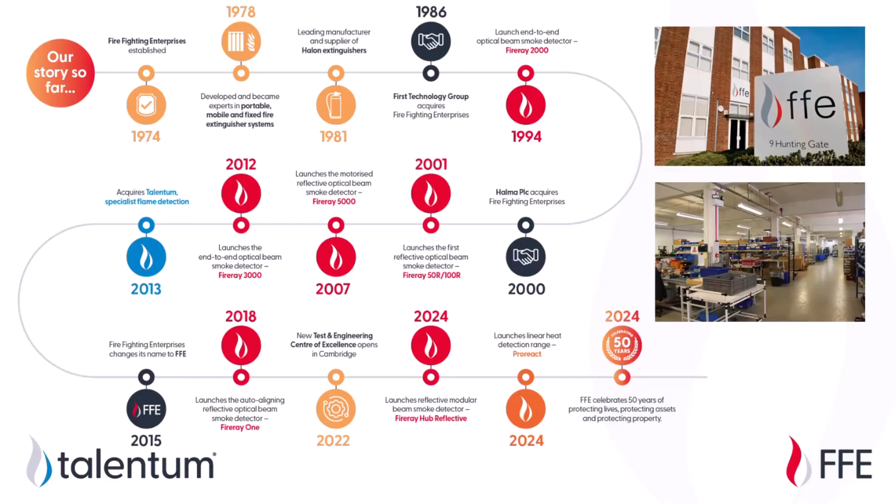And we have worldwide approvals and certifications. Each of our products is also 100% inspected and tested before it goes out the doors. And as somebody who handles the tech support aspects, that's something that I appreciate, and it is exceedingly rare to find a defective product from the manufacturer out there.

So optical flame detection, and we'll talk terminology on that, how you might see it in the codes and standards and things like that. These are devices that do detection of fire, unwanted fire. And so the agenda is we'll go through the what, where, why, and how, as well as some of the who.

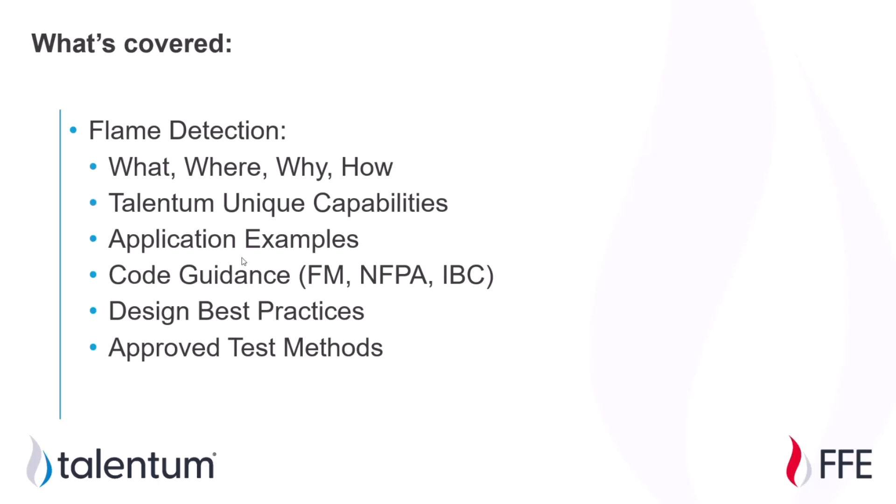There's some unique capabilities with the Talentum product line that you won't find anywhere else as far as flame detectors are concerned. Various application examples are sprinkled throughout, along with code guidance or standards, including FM data sheets. There's something new that's very relevant for flame detection in International Building and Fire Code 2024 edition. We'll talk about that. When designing with flame detectors, we'll talk about some best practices, what those codes and standards say, as well as how to do your testing, what kind of options you have there.

So a flame detector in the fire and life safety industry is something that is sensing or detecting unwanted fires. This is sometimes confused with flame monitors, also sometimes called flame detectors, and that's more in the industrial realm when a flame monitor is checking for wanted flames. So think of like a pilot light or something like that, where you have a flame or a fire in an application, and it's making sure it is there when it's wanted. These are detecting unwanted fires, flames.

So the NFPA 72 definition of a flame detector is a radiant energy sensing fire detector, and you will see it worded that way in many of the NFPA standards as well as FM data sheets. So keep a lookout for that. It might just say radiant energy sensing fire detector and not flame detector.

So a flame detector, how is it different than other detection devices? Well, it's detecting the light that's emitted by the fire itself. A lot of that energy or those photons emitted from a flame are in the visible spectrum, so we can see them with our eyes. But a lot of that energy is emitted in wavelengths that we cannot see with the naked eye, so that includes infrared, that includes ultraviolet.

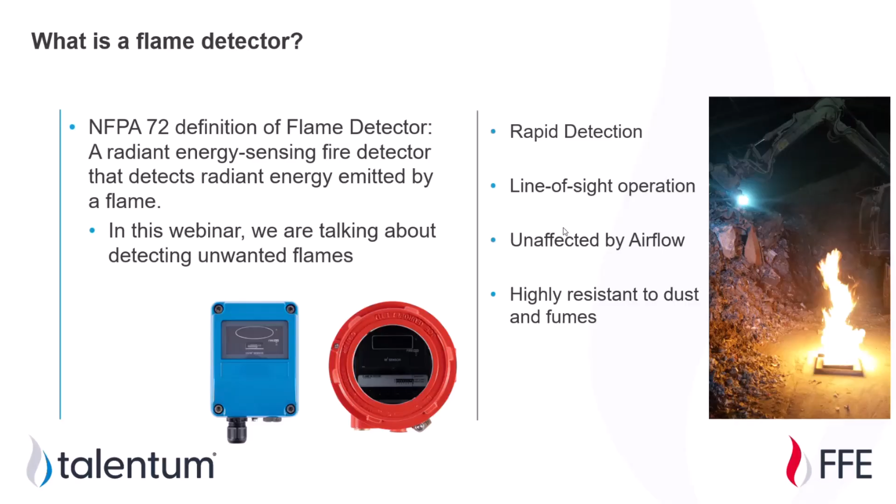The main applications for optical flame detectors - we know oil and gas is a very big industry, one of the biggest in the world. So lots of flame detectors are used all the way along that supply chain or production process, from crude, offshore rigs, refineries, midstream, as well as all the way to the dispensers for consumers.

You have different industrial applications. Paper and textile - actually the Talentum company was founded by the owners of a textile mill for their use in that application. We'll talk more about paper and textile later, and some of the standards involved. You have aircraft hangars - optical flame detectors have been a very integral part of designs for aircraft hangars for many decades. We'll talk about some of the latest developments with that, as well as what people are currently using for aircraft hangars.

General industrial can cover lots of different things - hydraulics, conveying, various hazards. A lot of it is insurance driven, but not always. Sometimes these are used as life safety devices. FM really does carry a lot of weight when it comes to optical flame detectors. UL really doesn't get involved with optical flame detectors, although it can be used as a life safety device. Then you have battery areas - some of the newer editions of the International Building Code and International Fire Code have new language regarding battery areas that includes flame detectors.

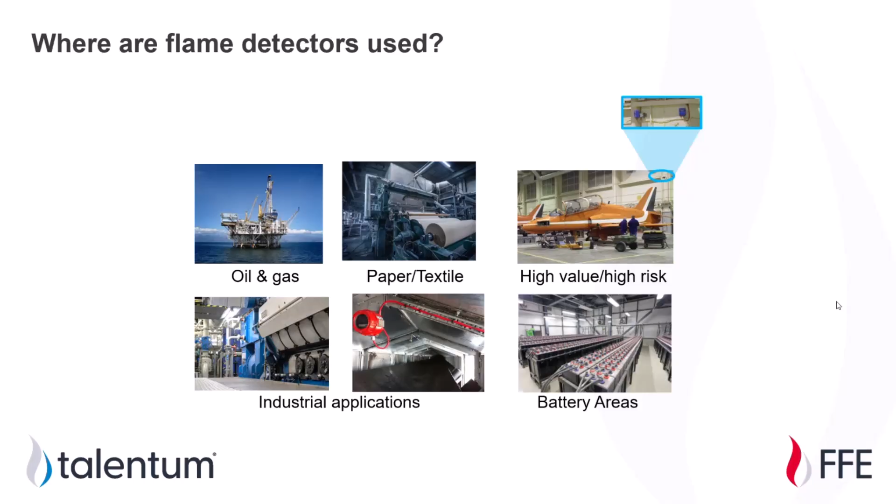So why would you use a flame detector? The obvious reason is a code or standard requires it - this could be various NFPA standards, building codes, fire codes, and things like that. It could also come from an insurance requirement. We know FM has lots of data sheets which standardize a lot of the fire protection and prevention aspects in factories especially.

With optical flame detectors, when it comes to hazard types and response times, these are typically heavily engineered designs that the devices are being incorporated into. It could also be a standard or preference by a corporation or tenant for their buildings, based on what hazards and risks they have going on. But the common thread is typically that you need fast response time, and what happens after detection can vary - shutting things off, having suppression, or simply alarms. Fast response time is the name of the game, as well as prevention of nuisance alarms. So two very important factors.

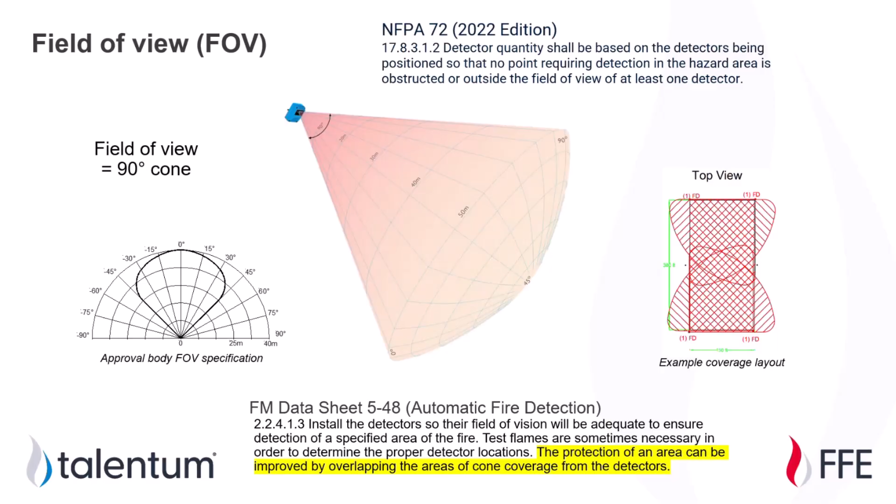Also, the FM data sheet recommends overlapping of coverage. So you're typically going to see every spot in a hazard area covered by at least one, if not at least two, separate detectors, just because of the nature of temporary obstructions and the unknowns involved with that.

NFPA 72, right off the bat, says there should be an analysis done, or an engineering evaluation as well. Important factors that get their own sections include matching the spectral response to the spectral emissions of a specific hazard or fuel for the fire. So if you have a solvent room, whatever the spectral emissions of that solvent is, you're going to want a device capable of detecting that and matching those emissions with the responses.

And also with optical flame detectors, they're having to make decisions very quickly. For human terms, I guess it's very quick, but for a machine, maybe not so quick. But you always want to be conscious of the potential for nuisance alarms. You have infrared and ultraviolet and visible light sources everywhere in lots of different places. Being conscious of those and doing an assessment is something NFPA 72 recommends.

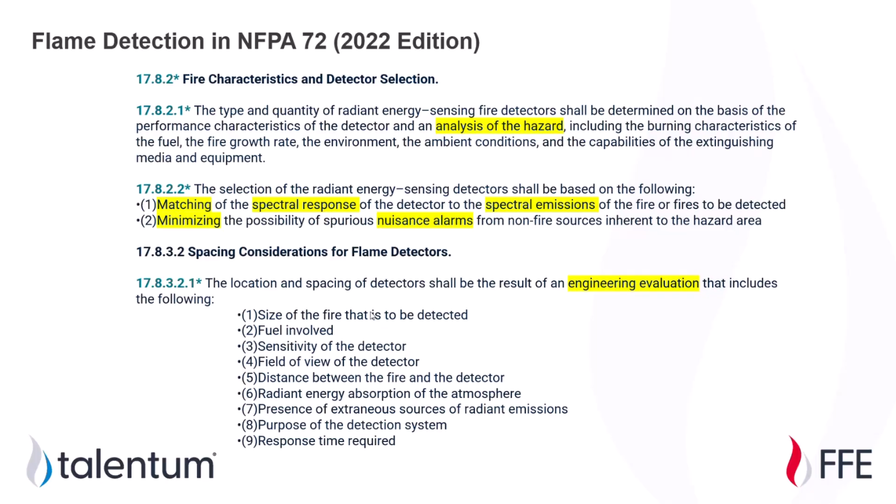And they give you 9 different factors that should go into your engineering evaluation. The FM data sheet goes into a lot of the same stuff, with FM doing the actual testing of devices, which includes testing with nuisance alarm sources. So a lot of that is listed out in the FM data sheet.

So X-ray machines, arc welding, different germicidal lamps that maybe use UVC, considering the fuel, as well as matching the spectral response to the spectral emissions.

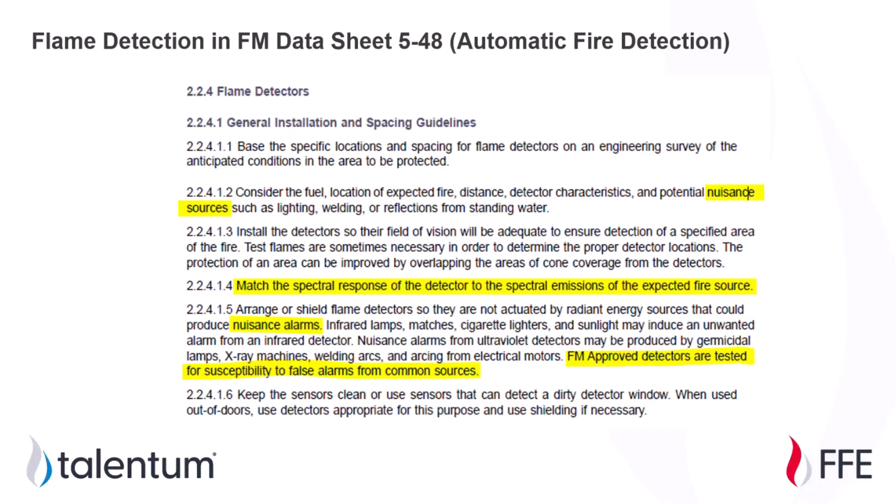So we'll talk about the different categories of fuels. There's 3 or 4 main categories that you can have a fire from, different fuels as it relates to flame detectors. Essentially solvents, hydrocarbons, and then some gases like hydrogen, that are all going to have different spectral emissions.

So some of those fuels here, hydrogen is a unique one. It burns almost invisible to the naked eye. If it is a sunny day and you have a hydrogen fire, you may not be able to even see it with the naked eye. Hydrogen is being used in fuel cell technology. I know a lot of warehouses have started using hydrogen-powered fork trucks, so there's less downtime than regular batteries.

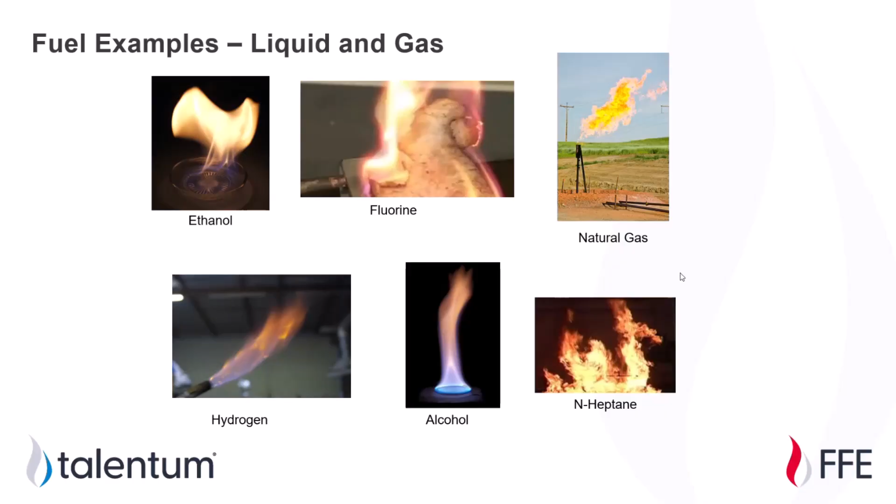Flame detectors come into play with that, as well as your other gases. And your solid fuel examples, of course, we know things that have higher susceptibility to fire and flaming type fires: paper, plastic, textiles, electronics, including batteries, which are becoming more and more prevalent.

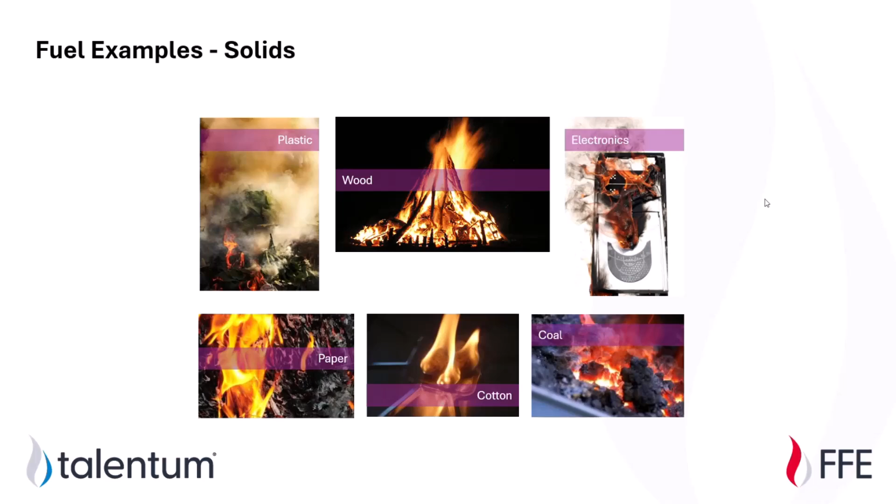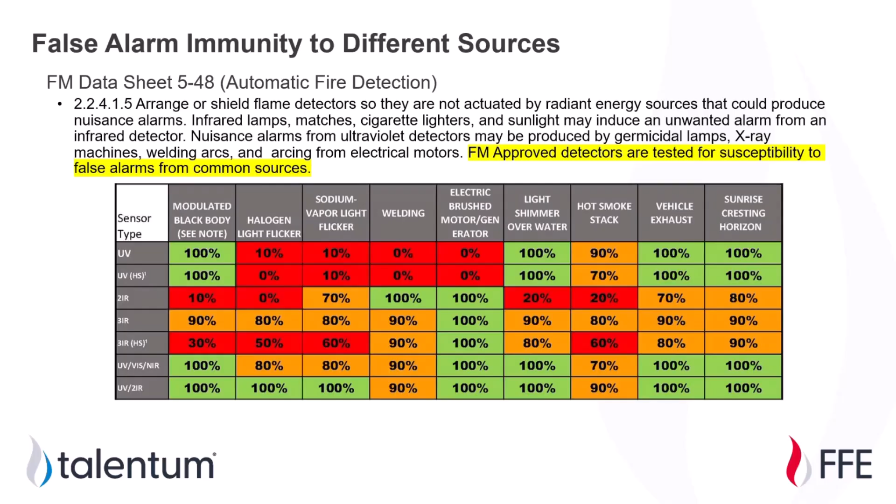And typically, you can see the more sensors that you have, the better false alarm rejection you'll have. And that's not always the case. It's going to depend on the environment, on the false alarm sources.

Hydrogen is one of the unique ones, does not have that spike. So if you're using any old flame detector that is geared to 4.3 microns, like most flame detectors are, you run a very high risk of not detecting it.

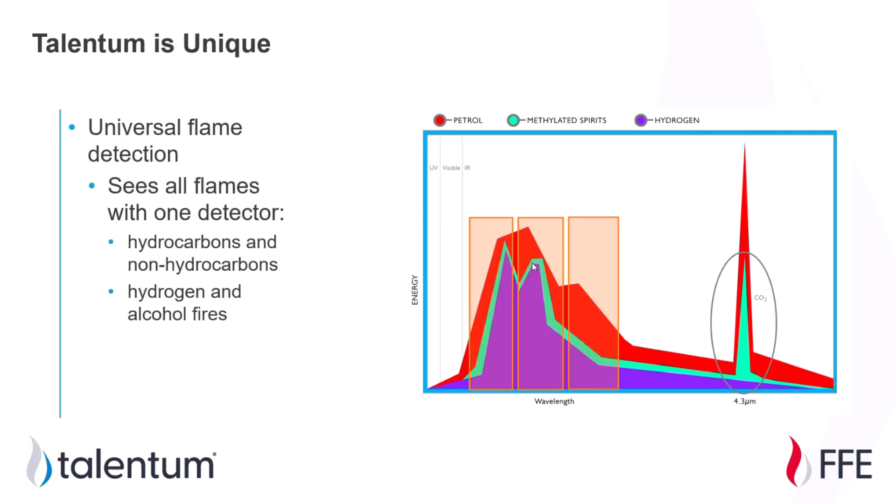So with Talentum, it is sensing more in this region of the infrared spectrum, so near IR covers your hydrogens, hydrocarbons, and solvents.

So with Talentum as well, if you have, say, 3 IR, which is one of our common flame detectors that we offer, meaning there's 3 IR sensors, each of those 3 infrared sensors need to sense or detect the flame, or the light, the photons given off by the flame. Not only do all 3 need to detect them, but they also need to be in the right proportions. So for certain sensors, you could need to see 3 times higher energy amounts than another wavelength. It's comparing the level of signal that it's getting to one another, and that is one of the verification methods that helps prevent false alarms.

Also, it makes sure that the signal that it is getting is a random flickering, because natural flames are going to have a random flicker frequency. If you think of a strobe light, that's going to have a constant frequency, and it will reject anything with a constant frequency. If you think of sunset, if you put a shop fan in front of that sunset, it will create that strobe effect, but at a constant frequency. That is something that is rejected.

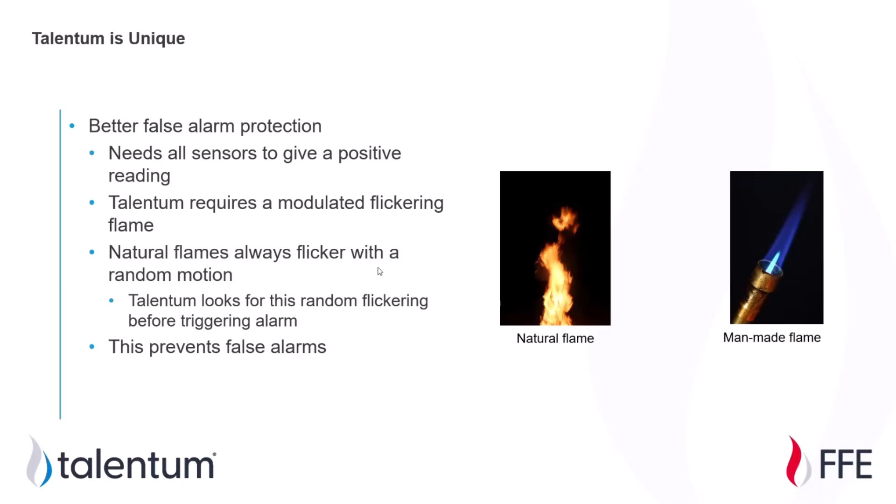So just some of the methods in the firmware of the devices where it's verifying and helping to prevent false alarms or nuisance troubles, nuisance alarms.

So another unique aspect with Talentum, ignoring the 4.3 micron CO2 spike that most other flame detectors focus on, is that in that wavelength, or near that wavelength, you have glass absorbing or completely rejecting any light trying to pass through. So we can see through a plate of glass no problem in the visible spectrum, but in other wavelengths that we can't see, it might be as opaque as anything. That is the case with the 4.3 micron spike, it is almost completely blocked by plate glass.

So a lot of these devices that focus on that wavelength, they'll use other types of materials for their lenses, like sapphire and quartz and things like that. So with Talentum, it has been proven through third-party testing that it can detect fire through plate glass as well as clear polycarbonate. And we're going to go into more detail on that testing.

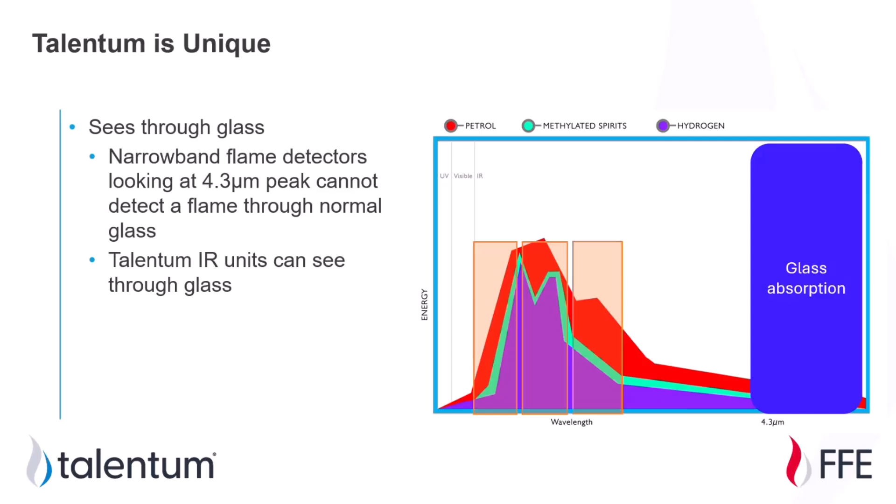And it's by no means approved or certified at long distances, but as a proof of concept, it does have the ability to, at a very good performance, detect through glass and clear substrates like polycarb.

So here was the test. You have University of South Carolina, Aiken, testing in conjunction with a nuclear facility. And the interest in the testing was they have these glove boxes.

If you think of Homer Simpson with the glowing yellow uranium on mounting devices inside glove boxes, or environmental chambers with glass, being able to mount detection outside of these is desired. The test was set up at about a 6-foot distance with either a plate of glass or polycarbonate right in front of the Talentum IR3 model alongside a video flame detector, another device available on the market. It was thought that since the video flame detector can see through glass in the visible spectrum, it would do well in this test too, but it turned out the Talentum IR3 outperformed the video flame detector.

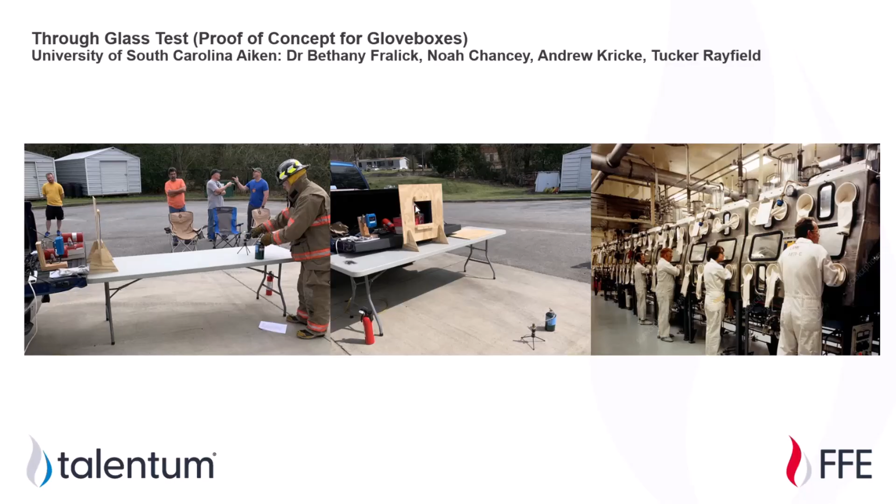So the triple IR, or IR3, is the configuration of 3 separate infrared sensors. You'll see 2 different photos of these devices throughout this presentation. This rectangular blue one is a non-explosion proof housing. It's still cast metal and has a good ingress protection rating and things like that.

But we found that in many applications, even in a hazardous location or not, explosion-proof devices are not always needed. We've compiled over 10 or 12 projects where the assumption was that explosion-proof devices were needed, rated to certain hazardous classifications, when in reality, based on the actual project specs or the location of the devices in relation to the actual hazardous area zone, that was not needed. So you can save a lot of money by going with a non-explosion proof housing, still cast metal. Those are available, and we pass that cost savings on to you if you're dealing with those kinds of projects. Those projects run the gamut from laboratory, oil and gas, heavy industrial, to light industrial - a wide range. If you're interested, we can provide more info.

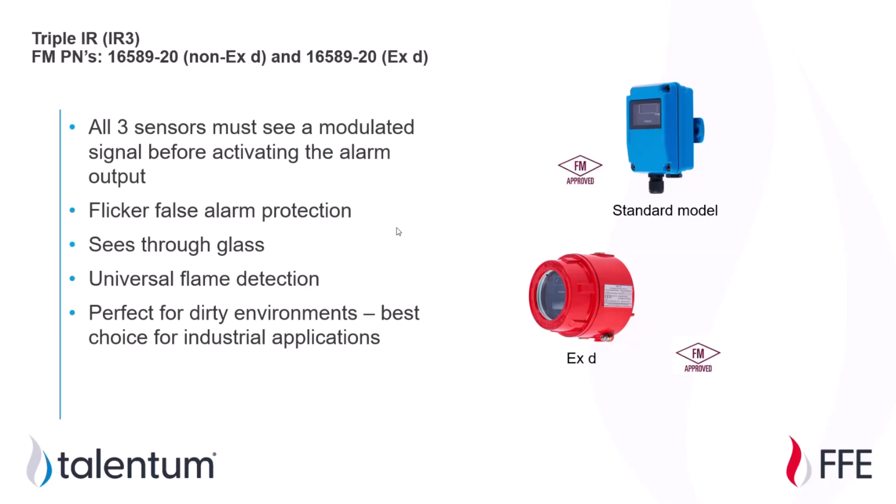So the IR3 model is available in non-explosion proof as well as explosion proof. The other sensor configuration we offer with Talentum is 1 UV sensor and 2 IRs. So instead of 3 IRs, you're swapping one of those IRs out for an ultraviolet sensor. You may see better false alarm resistance when doing this in full sunlight, fully outdoor environments. One potential drawback of going with UV instead of all infrared is that you won't have as good penetration through dust, smoke, and other airborne contaminants.

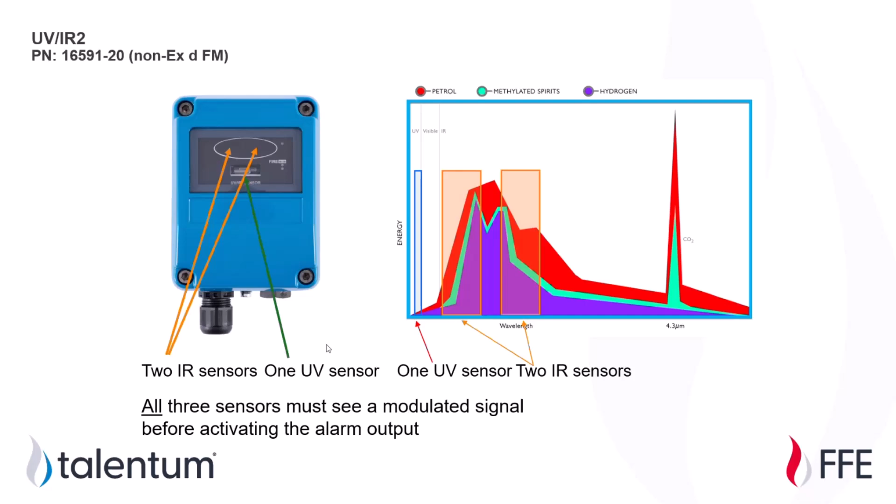FM approval is a given. Pretty much all of the US flame detectors used in the market are going to be FM approved. That's kind of the standard or benchmark for flame detectors.

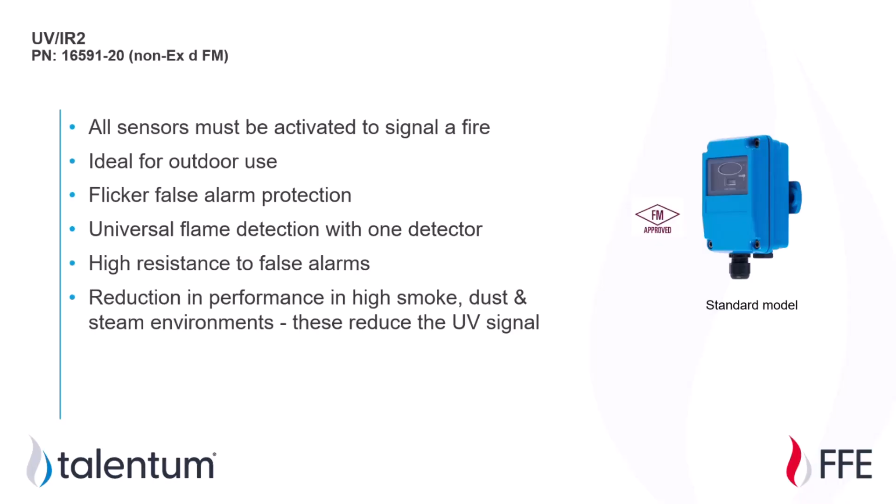And the UV IR2, same concept as the IR3, could do a little bit better for you in those high sunlight areas, fully outdoors. We have people that use the triple IR, the IR3, fully outdoors, even facing towards a sunset over shimmering water, and they've never had any issues with false alarms. So it might give you a little bit better resistance there.

Accessories you might look at when doing a design with flame detectors: usually mounting brackets, but you're going to get those with pretty much every project, especially given the nature of flame detectors and their field of view needing to get dialed in towards a specific place within a hazard zone. Weather shields are very common for outdoor applications, bale yards, and places like that. Sometimes the weather shields might be used as field of view restrictors, like a horse with blinders on - if you have a welding area off to the side doing arc welding, you want to prevent any energy from that arc welder getting into the detector causing a false alarm. You can use these to square off that field of view.

Test simulator - this is a handheld device with an LCD screen. You select what kind of detector you have, hold it about 10 feet away, and it's able to simulate the UV and IR energy from a fire to put it into a false alarm. Always make sure to isolate the devices before doing so. Air purge adapters are a little less common. They are available if you have a high dust area or something like that.

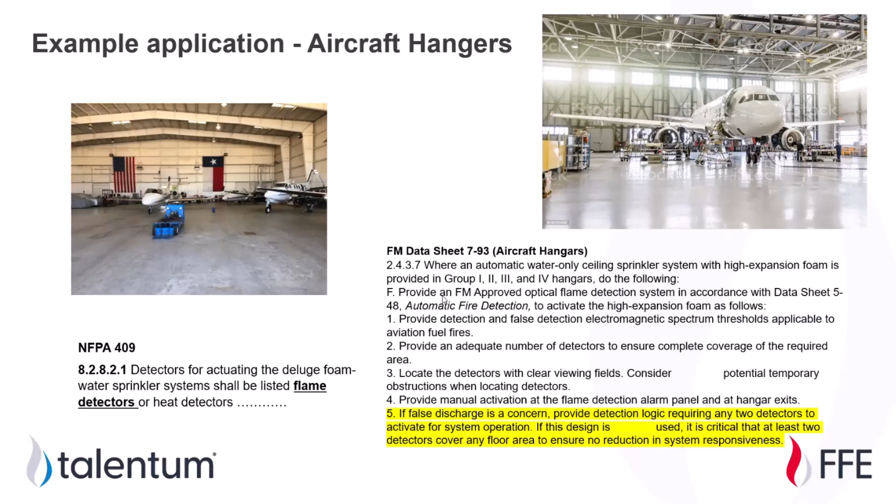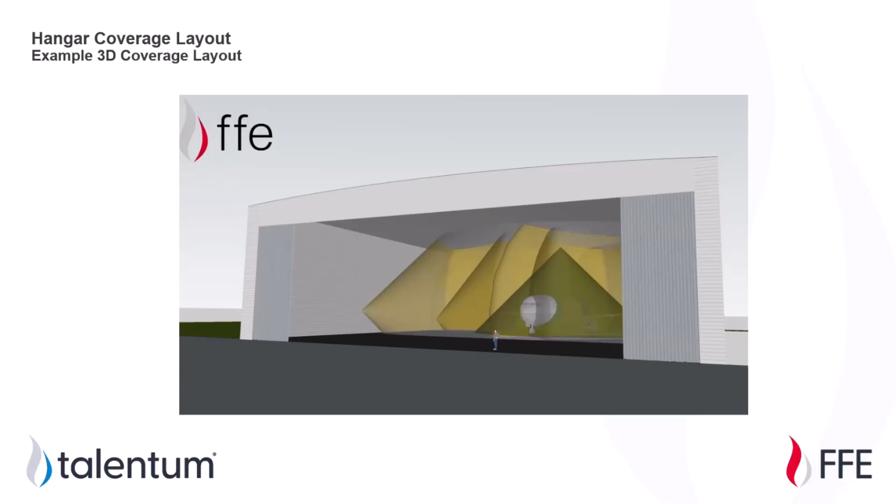Some hangars and for some aircraft, they may want under wing protection and over wing protection, or detection, I should say. So the mounting locations of your devices will depend on what the needs are. There's also a difference if there's maintenance activities happening in a specific hangar. May need additional detection.

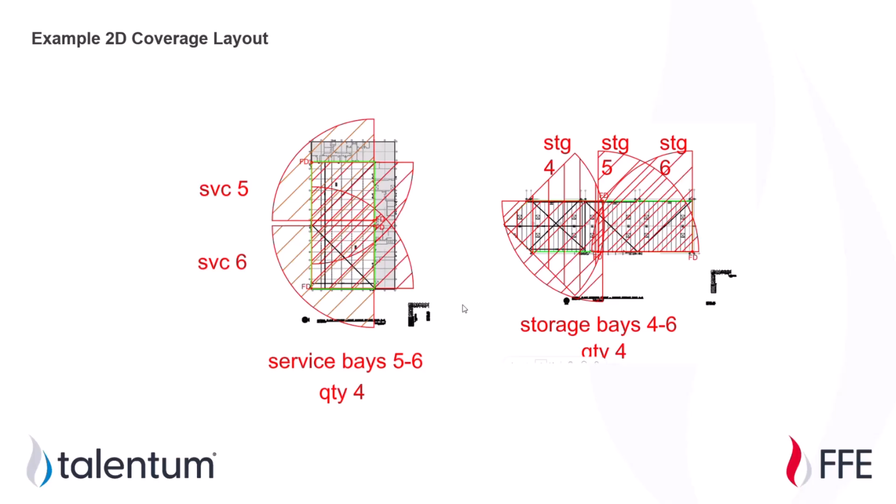So moving on here to batteries. And this is not just battery energy storage systems, or sometimes called BESS, where you have these big batteries that are storing and generating power, transporting power. We do see those in a lot of odd spots now, not just in remote locations, but they can be in parking garages sometimes. If a high rise doesn't have the real estate, we see them as backups in data centers a lot of times.

So there are the battery energy storage systems, which has been a hot topic in the fire protection engineering industry. Recently, the best and brightest minds are working on that. But also just lithium metal batteries that are passive, that aren't connected to anything. Maybe it's even in a box being stored in a storage warehouse somewhere. The new IBC and IFC 2024 edition, they don't make that distinction. They're leaving the door open for each jurisdiction to figure out what they want to enforce. So I don't think that if you have a handheld drill, that they're going to have detection requirements for that.

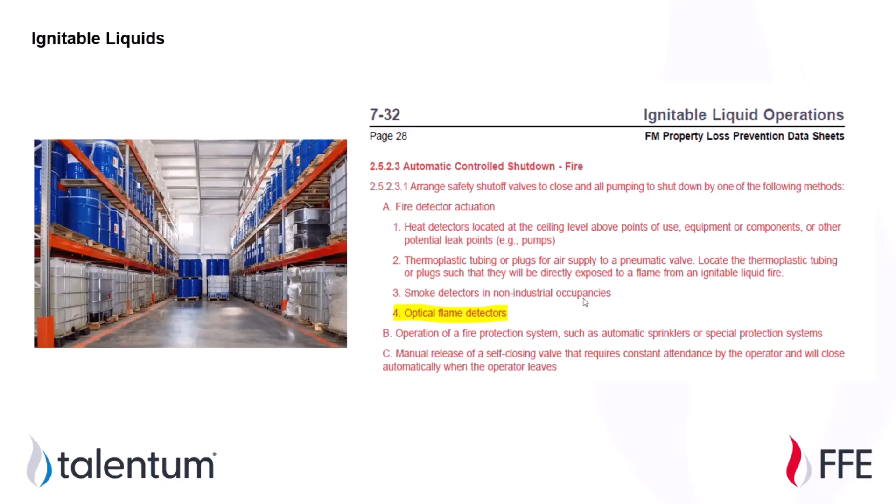Emergency power, running diesel generators or anything like that. You do want to assess how the shrouds might affect detecting a flame itself. If a flame is going to occur inside of a shroud, that might not be the best type of detection until the flame got big enough to spill out outside of any engine shrouds.

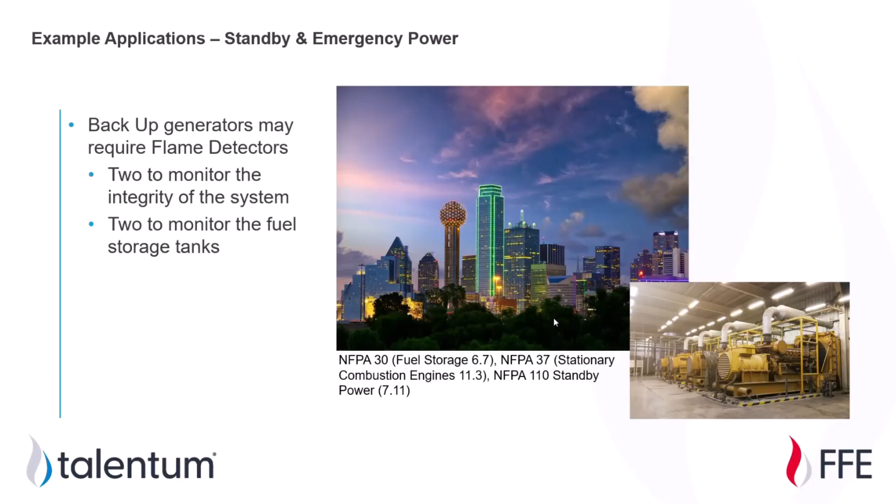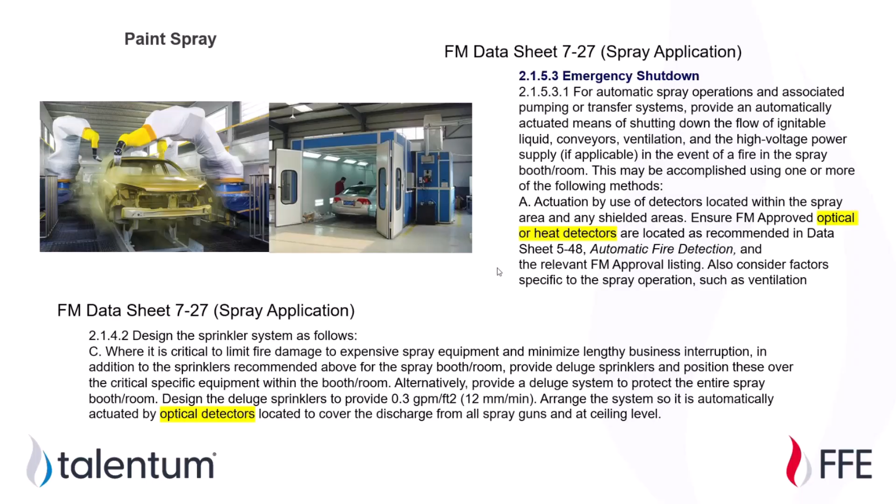So with electric vehicles becoming more and more common, you have the fire protection and detection challenges that go along with that. This includes parking garages, where you have a mix of electric vehicles, internal combustion engine vehicles, and chargers as well. So these electric vehicle charging stations, and then in this same parking garage, you may also have a battery energy storage system.

A lot of these standards are still being developed based on real world fire scenarios that have happened, a lot of it based on jurisdiction, not really to the point of having standards for this yet. But optical flame detectors are definitely in the conversation, as well as linear heat detection, especially with sprinklers and pre-action sprinklers becoming more common, especially in areas that can get below freezing.

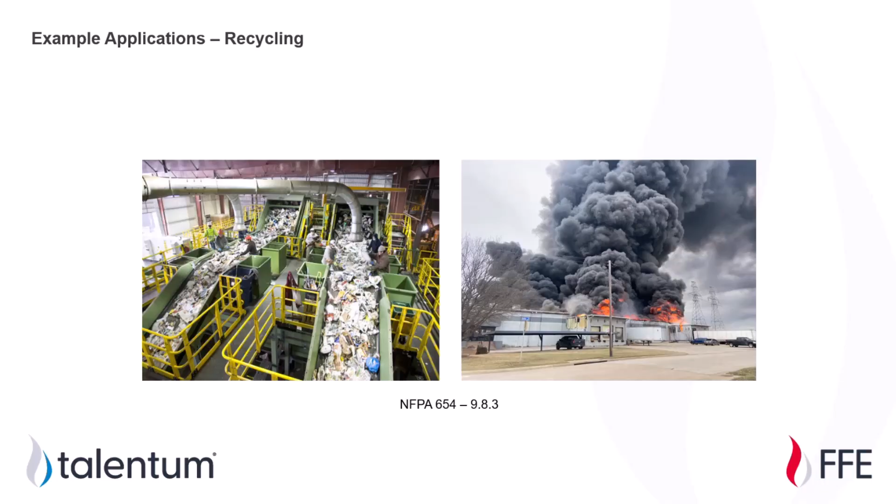Recycling centers, they're going to be dealing with a whole host of hazards, hazard types. So that includes your batteries, your papers, textiles. Those textiles might have been soaked in ignitable fluids. So a lot of those types of things are coming in those doors. And optical flame detectors are a good, fast response way to detect those flaming fires, especially with everything being out in the open.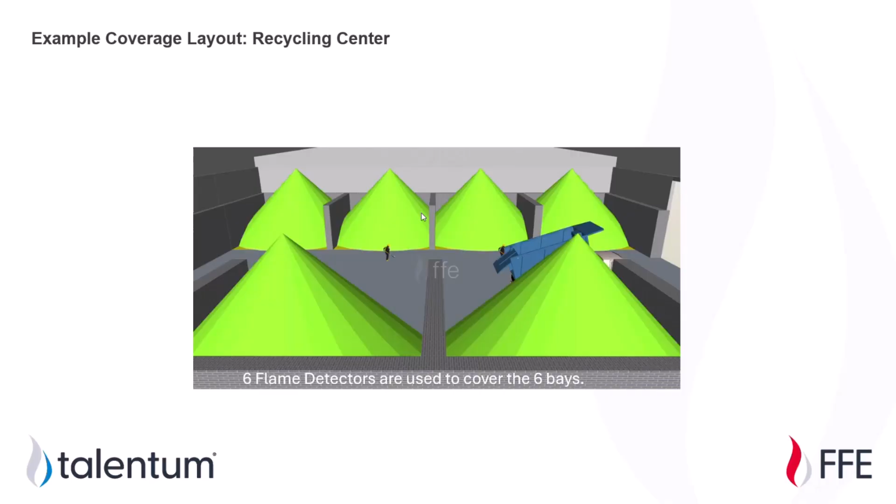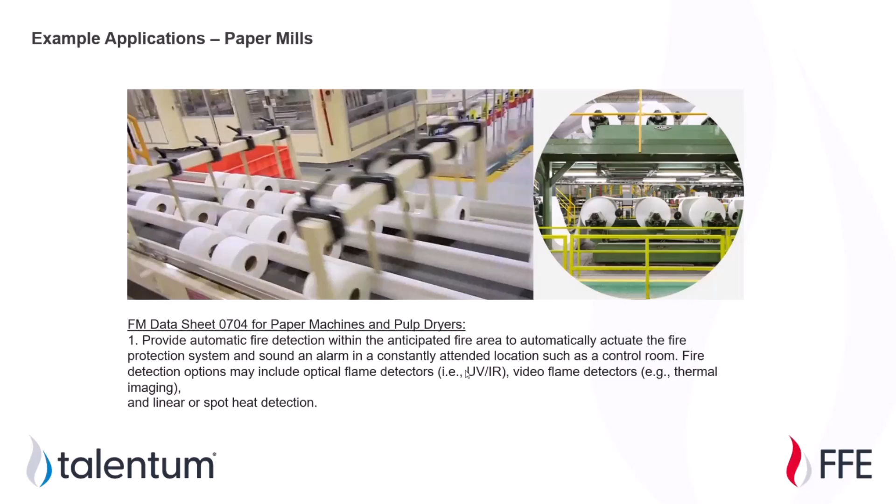We've worked on several paper mills recently. I don't really know what the machine does, but I know the shoe press is kind of the moneymaker machine for these buildings. So you might have multiple optical flame detectors mounted with the shoe press in view. And you have different power generation type facilities, including hydroelectric power.

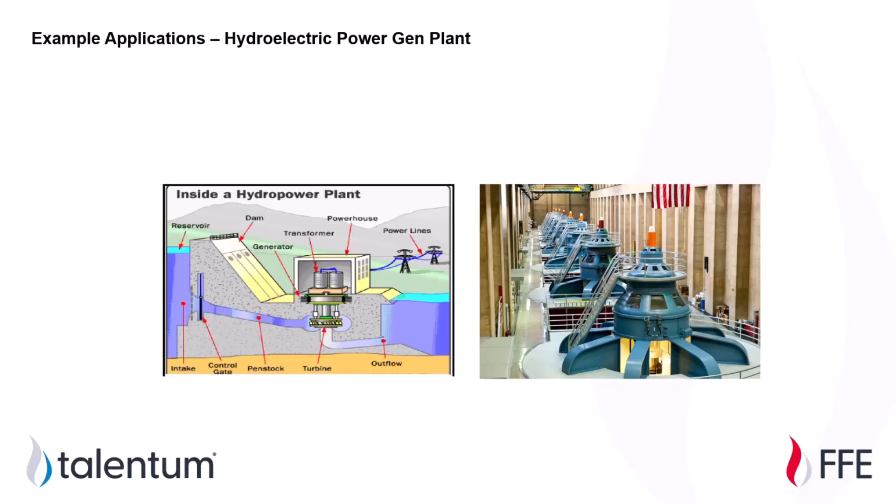Hydrogen fuel cell cars haven't really caught on yet in the US. Who knows what will happen? But I know that forklift trucks in warehouses have become more common due to less downtime.

But in NFPA 2, for hydrogen specifically, you do have the detection requirement of optical flame detectors, as well as leak detection, spill, and gas detection.

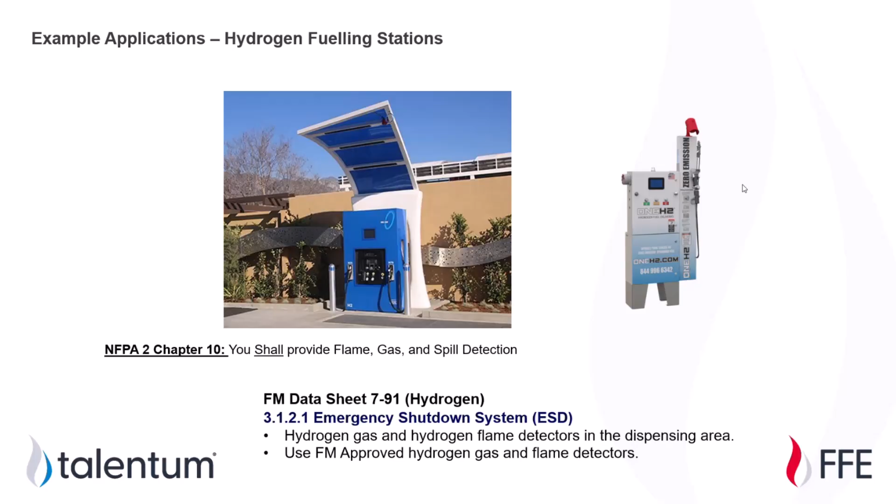And you have other types of manufacturing, including food plants, which if you have a high-speed cookie or tortilla line, if one of those cookies or tortillas is on fire, you may want to shut that line down. So usually flame detectors, knowing that they're going into an industrial type environment, will have some kind of analog signal output for tying in with your industrial controllers, things like that.

Hydraulics - if you have hydraulic fluid, that can become ignitable.

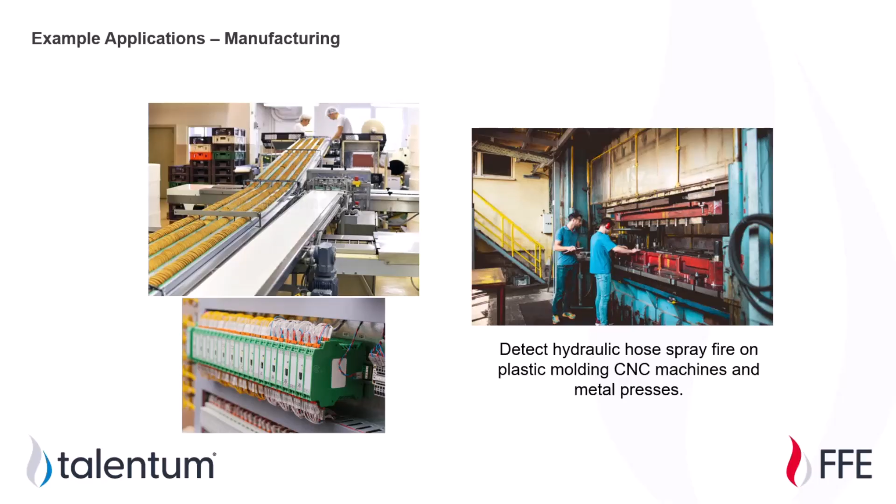And here we're getting to the last few slides. There are different options for testing flame detectors. The easiest is a remote test switch or just a key test station. Those are available for a lot of models that are out there.

A lot of devices have internal self-testing, and what that's doing is checking for optical integrity. It does a sensitivity test. It may not give good verification to an AHJ or to a technician who's looking to prove that testing was done, to just say yeah, it's self-tested and it's good.

Sometimes AHJs do want to see the bells and whistles. They do want to see panels show fire, or they want to see something more concrete than just it was a self-test.

So there is the handheld test simulator. The Talentum devices are also doing self-testing periodically, and most devices out there do.

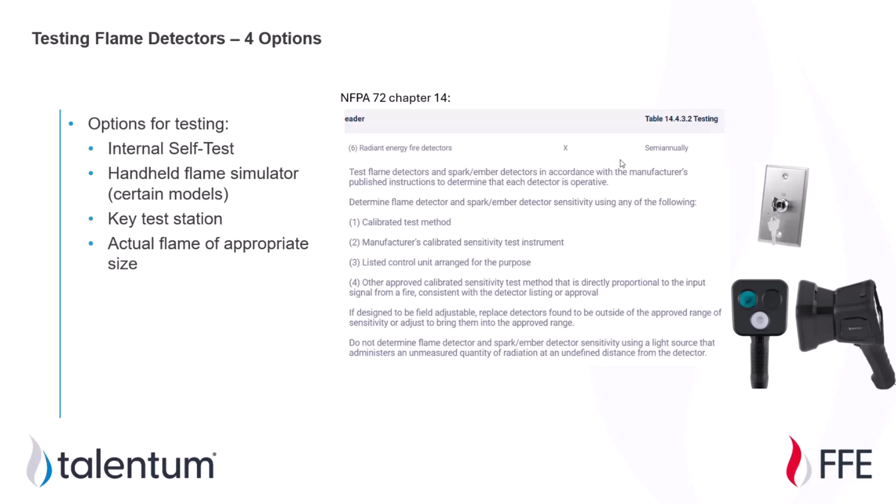And then the least attractive option for most, unless you have the means and that's your thing, is doing an actual flame or an actual fire test. You probably can't do that in a lot of hazardous areas unless you change things around, or maybe it's before it becomes a hazardous area that you're doing such a test. But that is a semi-annual test frequency, per NFPA 72, Chapter 14.

And I mentioned at the beginning that the maximum distance that any flame detector can reach or detect a fire is based on the standard size of fire of a 1 foot by 1 foot N-heptane pan fire. So keeping this in mind, when you're looking at a project, trying to figure out where to mount devices, how many, which one...

You're always going to want to think about what size of fire do I need to detect. If it's the size of a Bic lighter, then you may need to mount your devices a lot closer. Otherwise it may take some time for a fire to grow to the size of that 1 foot square pan fire - that is the standard.

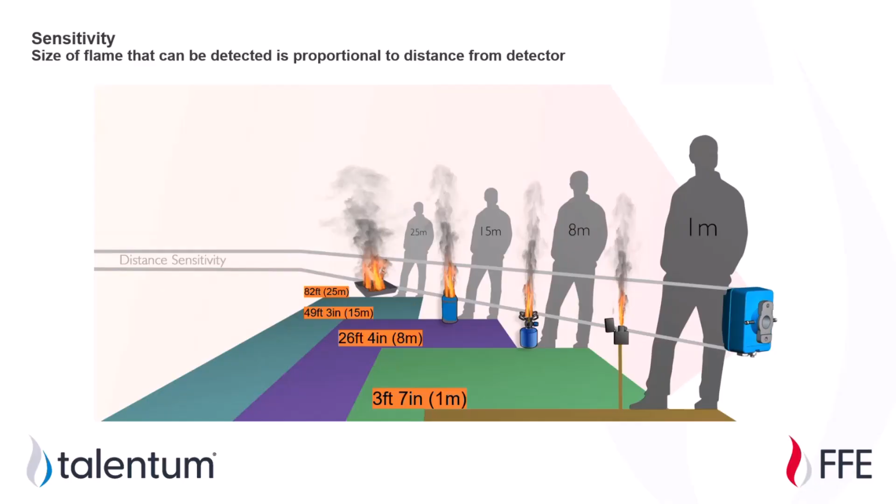So something to keep in mind: the closer that you get, the smaller of a flame that it can detect, and more quickly. The further away you go, if you have a giant fire, these will still detect them, but it's standardized based on the size, and that being a 1 foot square pan.

So some best practice stuff: you need direct line of sight - I think that's a given by now. Sometimes mixing detection types is good. Overlapping coverage we know is good.

As far as mounting angle, you have a 45-degree in all directions field of view. So typically you're going to mount it up maybe 8 to 20 feet on a wall. If you're doing wall mounted, you're going to be aiming that down at about a 45-degree angle. If there might be sunlight in the field of view, you can aim that even a little bit further down to keep the sunlight out of the field of view of the detector.

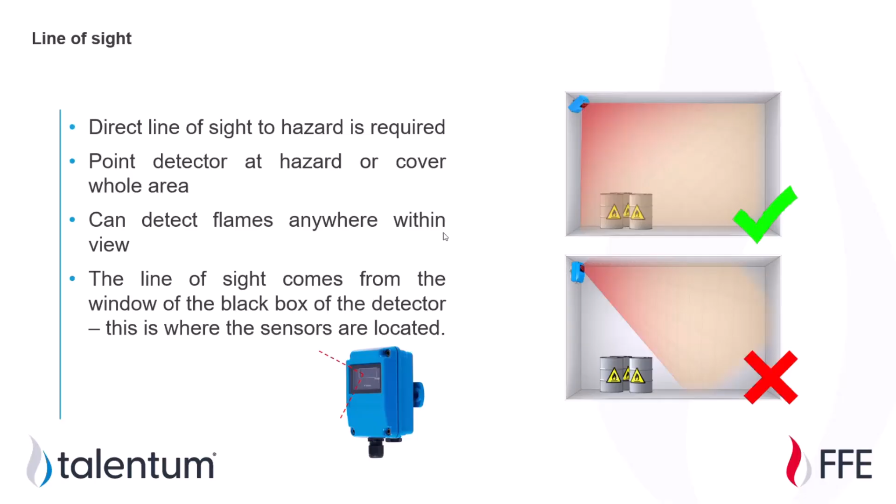And keeping in mind any obstructions, temporary or otherwise. It's pretty common that you'll need at least 2 detectors to initiate before you have a subsequent process happen, especially with suppression and things like that. So that's called cross zoning, sometimes voting or 2 out of N, meaning you need multiple detectors to verify that they are seeing a fire before something else happens.

The use of field of view restrictors can help prevent false alarms or nuisance alarms, sun and weather shields, as well as air purge kits, keeping dust and other stuff off of the lenses.

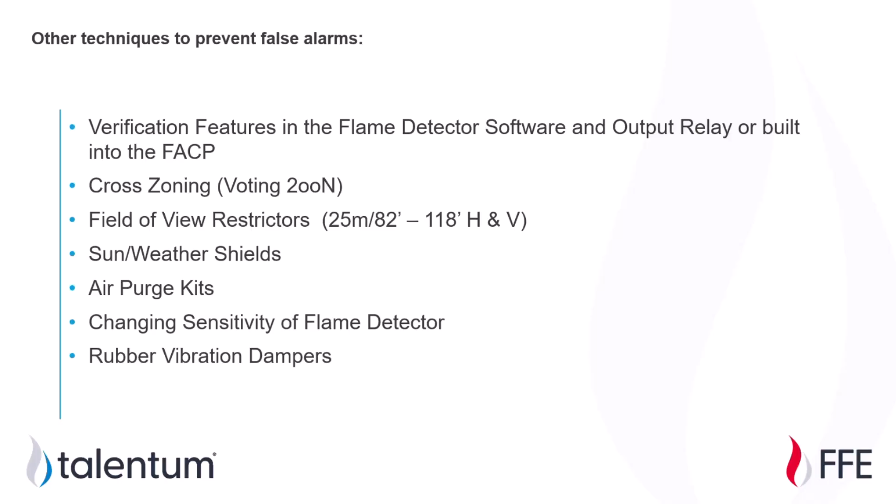Sensitivities can be adjusted, and verification times can be adjusted too. So usually the longer your verification time, the more sure the device is going to be, and the more data it has to base its decision on - am I seeing a fire or not?